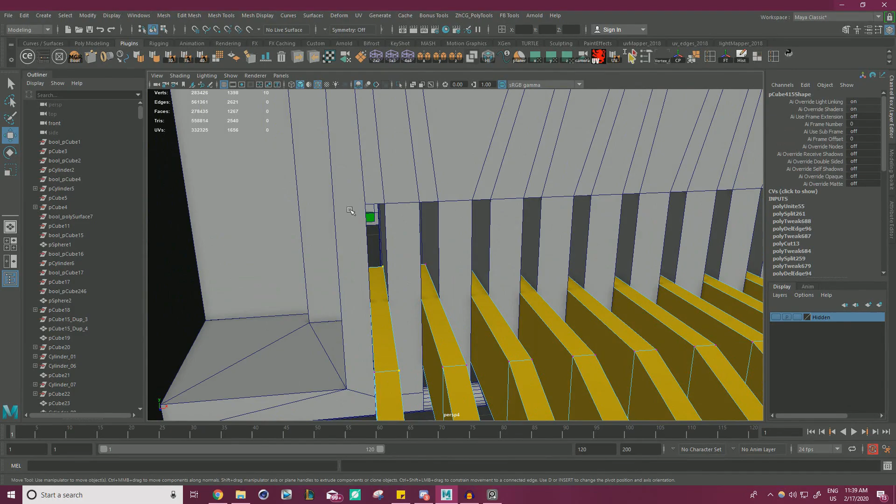And then I would just kind of snap them to these holes here, snapping all the way to the left and all the way to the right, depending on what side it was. Did the whole pass all the way through so everything's even in size, and it's definitely looking a lot straighter and nicer. Then of course I mirrored it over to the other side.

We kind of went over like 99% of it in the last part. I just wanted to make it clear that I did clean it up a bit. So now if I isolate it, it's definitely a lot straighter. There's no weird twists or turns or anything like that, and doing a pass like that was pretty necessary to get everything lined up properly.

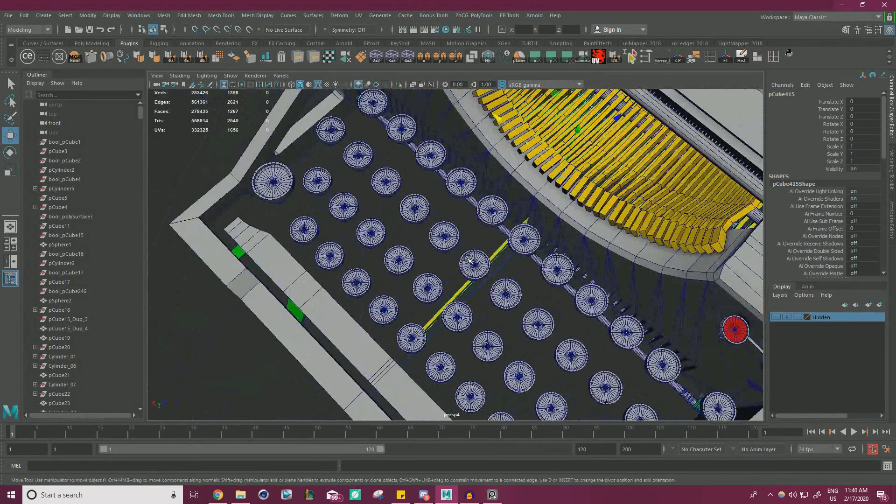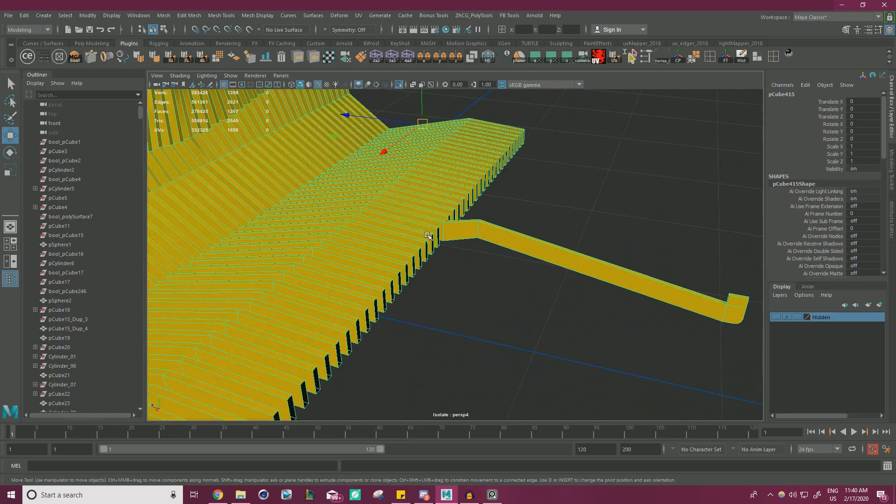But with that done, we can move on to this front part. I'm thinking about it quite a bit - there's always some unexpected twist or turn that comes up, but I'm really hoping this doesn't take too long. So I already have this front piece from the middle. If I isolate this, it's pretty much what we've done before, but it goes up, down, and then plugs in right here, with a bit of a curve to it.

What I'm going to be doing is duplicating it and repurposing it for the rest of the keys. So with that selected, we can go to our Smart Duplicate face. I'll probably just leave that open. We can center pivot, and let's just move it to the side now.

This should be fine, but essentially we can just go through and snap it so it's level. It seems like the width is a little bit different, so what I'm going to do for convenience sake, just so everything is consistent, is move it to the middle and then snap the width of this. That way everything else is the same.

If you isolate it, we want this end cap face to be deleted, and these end cap faces are also deleted, so we can just merge them pretty easily. But essentially we're going to want the keys isolated, kind of all of this stuff, because we're just connecting this stuff, right?

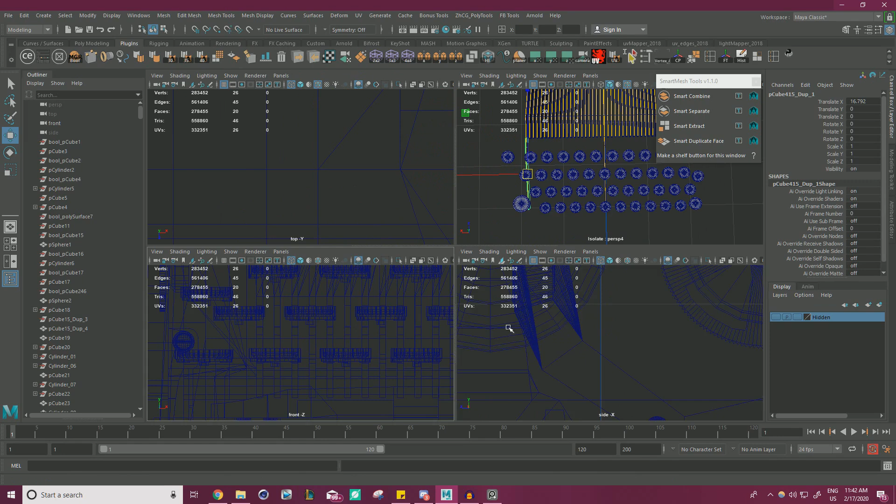So I'm going to be going from left to right. We can't really mirror this stuff over as far as I can tell because it's not perfectly symmetrical. If I go to my top view, yeah, everything's sort of shifted over, so we'll be having to do each key one at a time, which isn't too big of a deal.

One thing to note though is these extra keys that are different sizes - I think this is one of them. I'm just going to want to not do these ones, so I'm going to color them red so I remember them. I can't remember if this is one of the main keys.

I'm going to count. There should be 42. So: 1, 2, 3, 4, 5, 6, 7, 8, 9, 10, 11, 12, 13, 14, 15, 16, 17, 18, 19, 20, 21, 22, 23, 24, 25, 26, 27, 28, 29, 30, 31, 32, 33, 34, 35, 36, 37, 38, 39, 40.

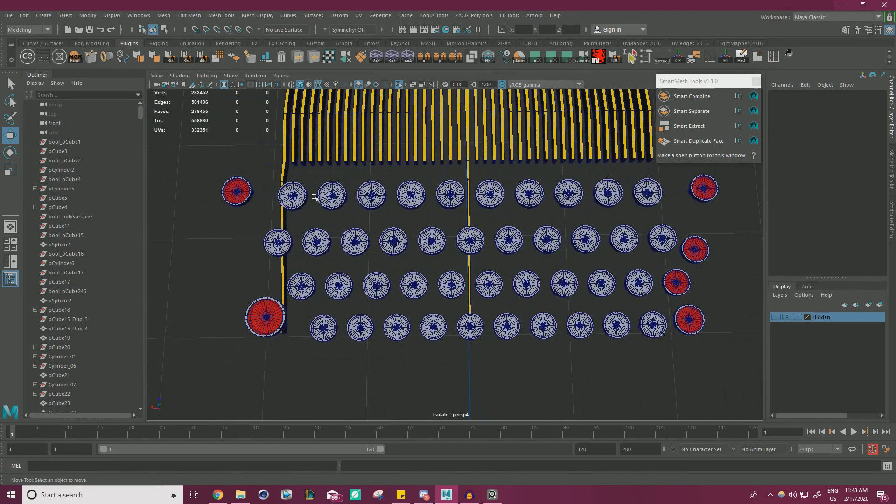That's only 40? Let me recount: 2, 4, 6, 8, 10, 12, 14, 18, 20, 22, 30, 32, 34, 36, 38, 40, 41. Okay, I miscounted - so this one is one of the 42. I'm going to change the color back to gray, and we'll be sure to connect that up.

The reason I don't want to connect to these guys is because we only have 42 of these connection pieces, and we have reference of these larger side ones having different connections. Like this is an example - it bypasses the regular system and goes to the back. Same with this here. So these guys get a special treatment. The main ones though just get connected to these yellow pieces.

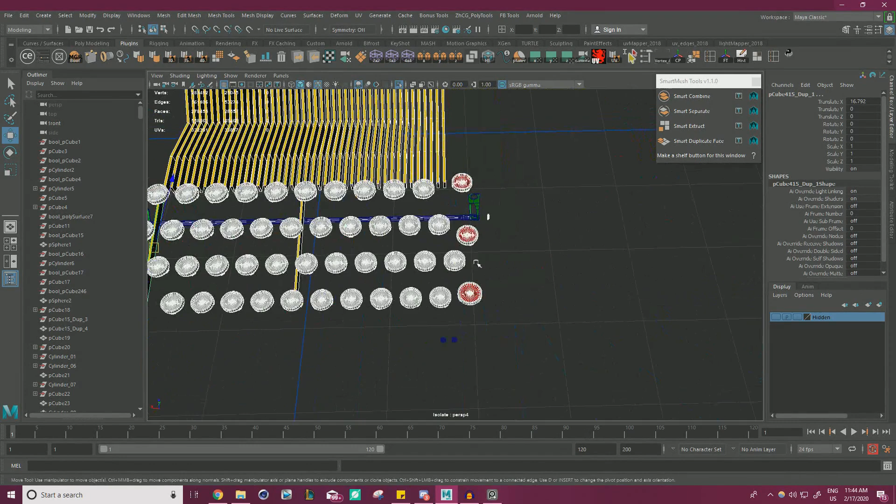So let's go back and select all of that, isolate it. Okay, so yeah, let's just go left to right. Should probably end up deleting those faces because we don't really need them. And essentially, we're just going to have to plug everything in. So I'm going to move the pivot to a corner here.

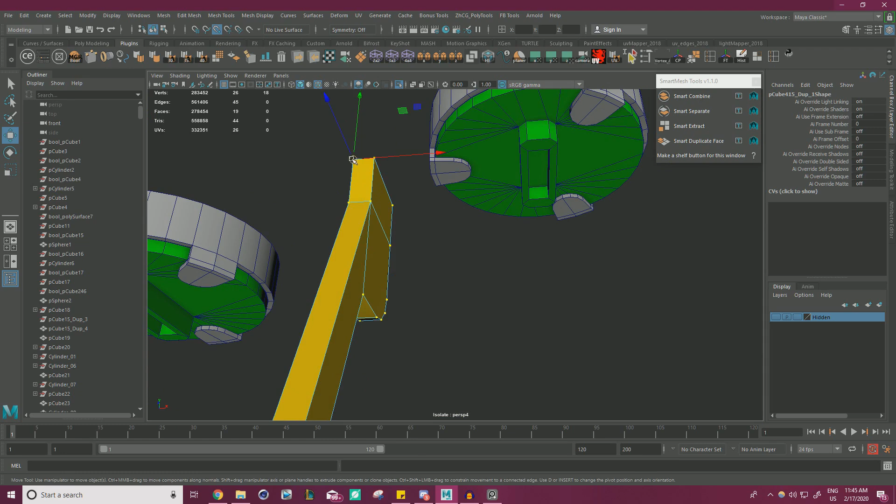We can just sort of snap it. Obviously, this is not correct. So let's grab this and drag it down. Move the pivot here and snap it with this so it's level height-wise.

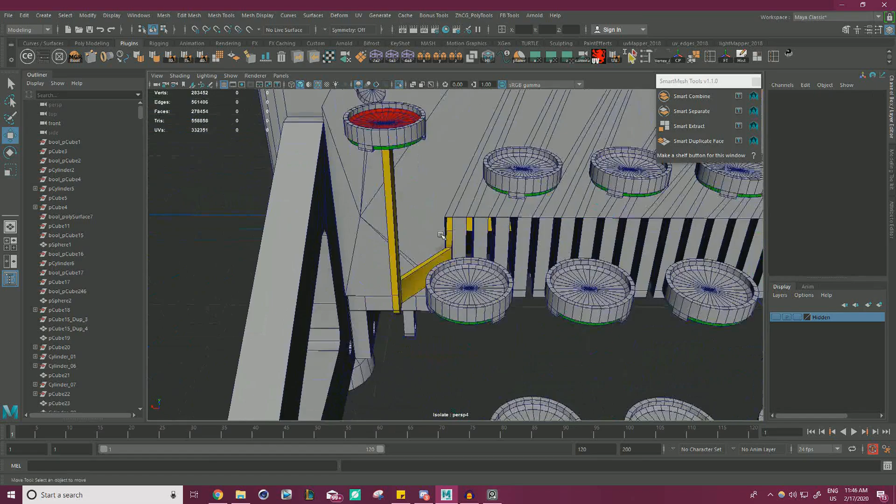Move this forward so it's level. And maybe we should include the frame here, as well as this guy, just so we have a better idea of what we're doing. So this is kind of off to the side. In fact, it's being plugged into one of the red ones that we agreed not to do that for.

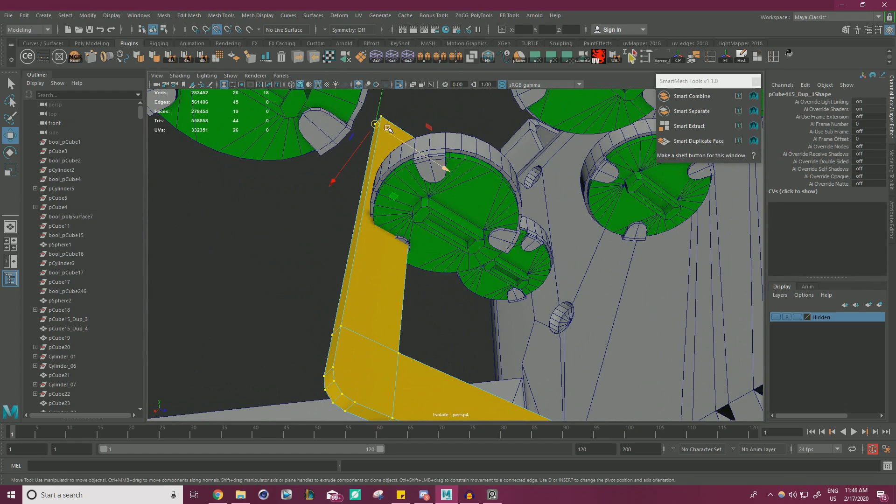So let's grab this. I think I'd probably put it to this one because this is the furthest left. Let's just sort of do this plug technique where we move the pivot to a corner, snap that, reset the pivot and move it up a little bit, and then we'll clean up the bottom.

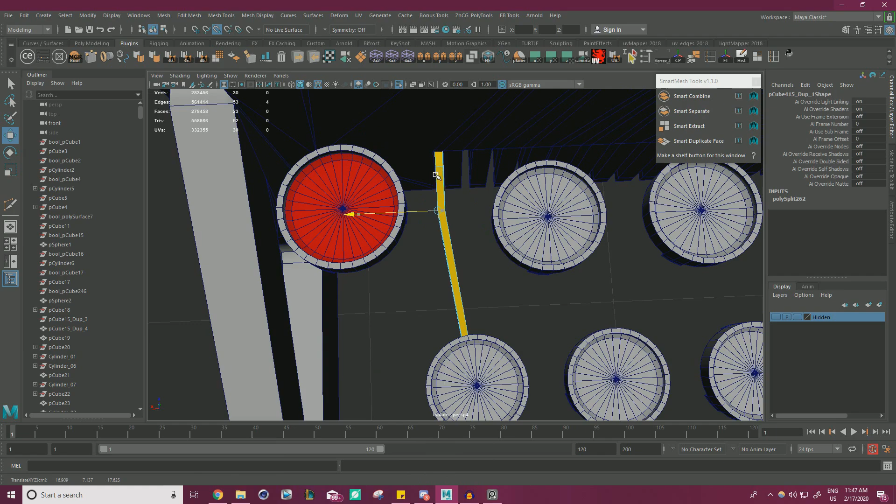So to clean it up, I think what I'll end up doing is adding in a cut and just snap it to the side so it's level, so it's at least coming out straight before it turns and rotates a bit. I'm trying to think where the best length to sort of have the straight part be.

Should it be straight and then curve right away out of it? Or be mostly straight and then curve at the end? I think I'm liking that a little bit more. So I don't want it coming out curved like this.

So I'm going to add a cut, move my pivot to the corner, snap that to the side, and that way it's mostly straight, curves, and then goes up. That way we can have them all coming straight out of these gaps that we've made. It seems a little bit more natural.

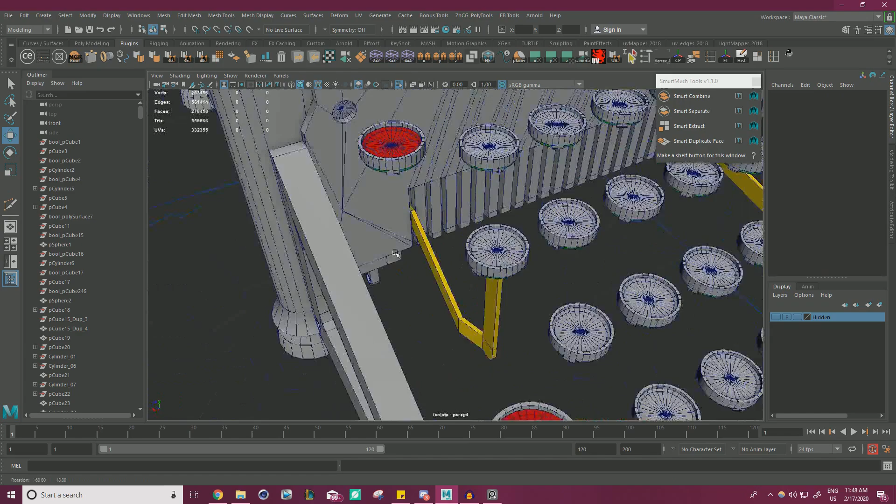Okay, that's one. Yeah, see where it's going to get a bit complicated is these gaps are so close, but then we have like key here, key here, key here. And they're all relatively close in position. So we'll see how that goes.

Let's go ahead and duplicate this. We're going to have to move our pivot to the corner, snap it. This one, we can do this one that's further down.

So same as before, put the pivot in the corner. Snap it, raise it up a little. I'm going to delete this for now so it gets re-straightened out. We'll add in a cut. Move the pivot to the side of the cut, and then we will force it to be straight.

Interesting, so this is an example of something we'll have to look out for. It's intersecting because we can't have it go straight that far, so when we're adding these cuts, it's going to have to be further back, so it's not intersecting with any geo.

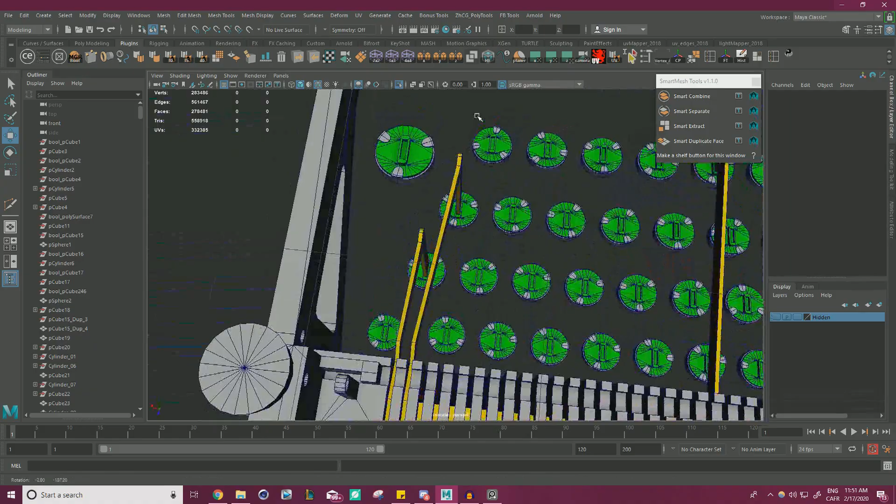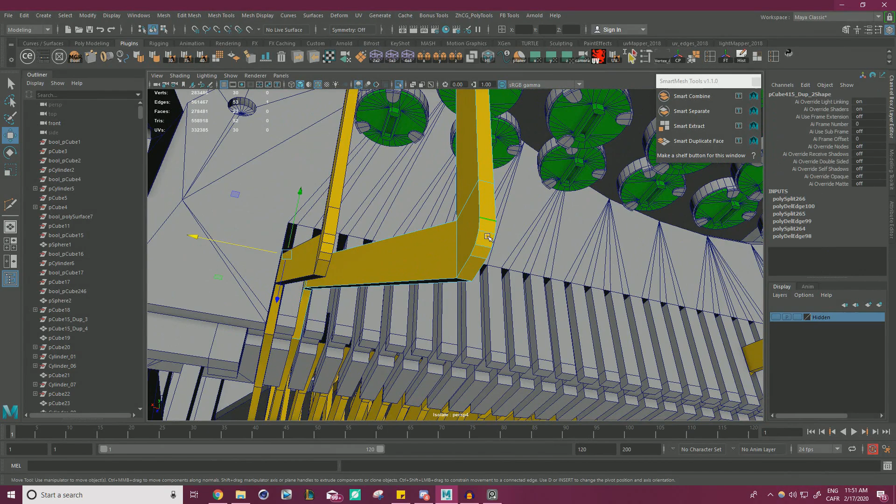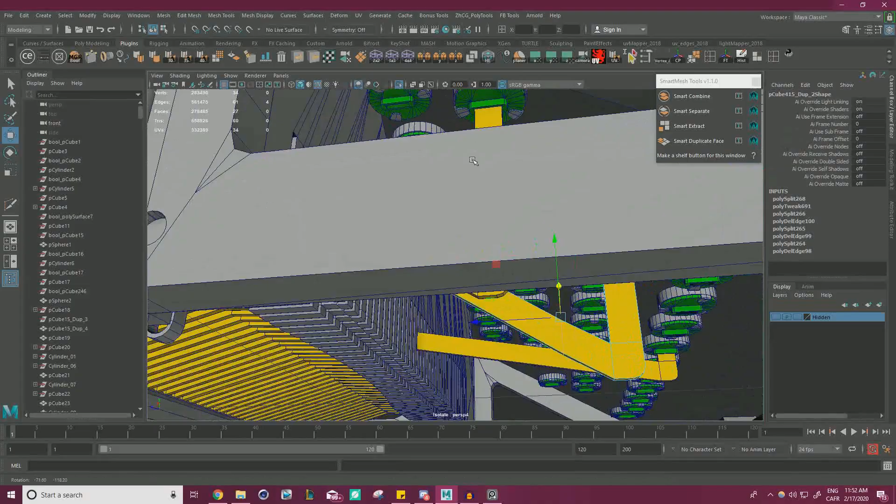I'm wondering if it looks weird to have this straight and then curve. I guess it kind of has to be that way though. Right? Unless I take these, move a pivot to a corner and straighten it out. Because in that way it's straight. And I think we'll probably do that kind of method where we straighten it out at the end, so it's straight, curve, straight.

Can do it for here as well. I think that works. Some of these more modern keyboard references I'm seeing, they're all coming out very straight. But as far as I can tell, we're going to have some sort of curves. It's the only way we can get them through properly. So we'll continue with this sort of method.

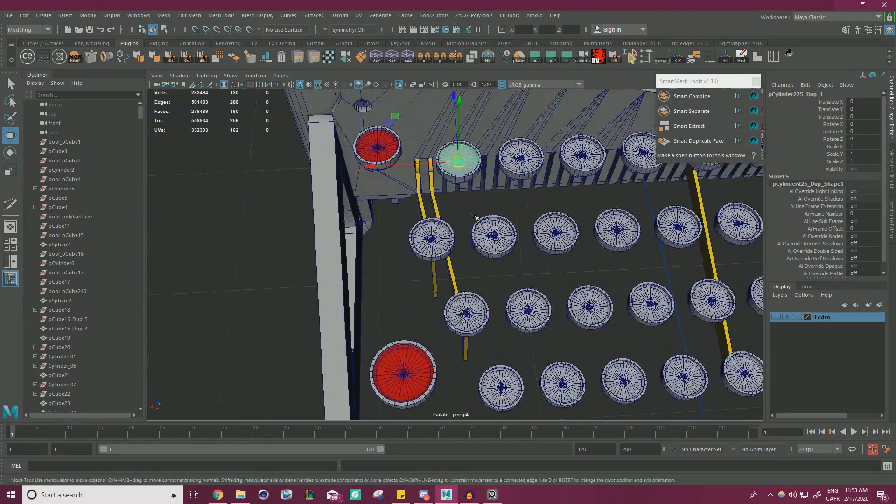We'll do this one next, since it's the next one in line. Duplicate that over. Pivot seems to stay there, which is really nice. So I'll keep this cut here. Or maybe not. I think that'll ruin things if we change the depth.

So I'm going to delete that. Grab this. Of course, move our pivot. Plug that guy in there. Okay, so let's delete this. Add in our cut here, make it level. Make sure to keep this straight.

I wonder if this is going to work for these short ones. If I then take this and snap it there, that looks a little bit goofy with the spacing. Unless I were to like pull it down.

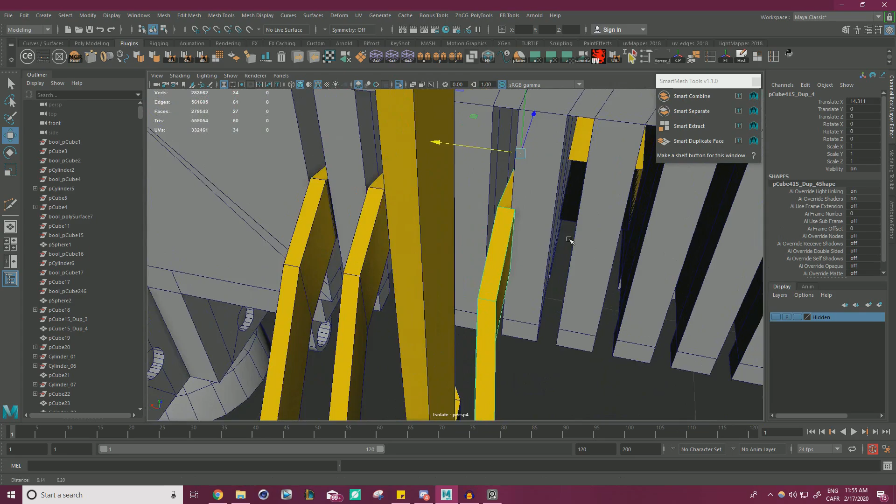Okay, that's another one. Now we have this next row where these two are in line. I think we should prioritize the back ones first, because we want less in our way on the way down, so we can do this one afterwards. So I'm going to duplicate this guy. Snap it there. Go ahead and delete these two for now.

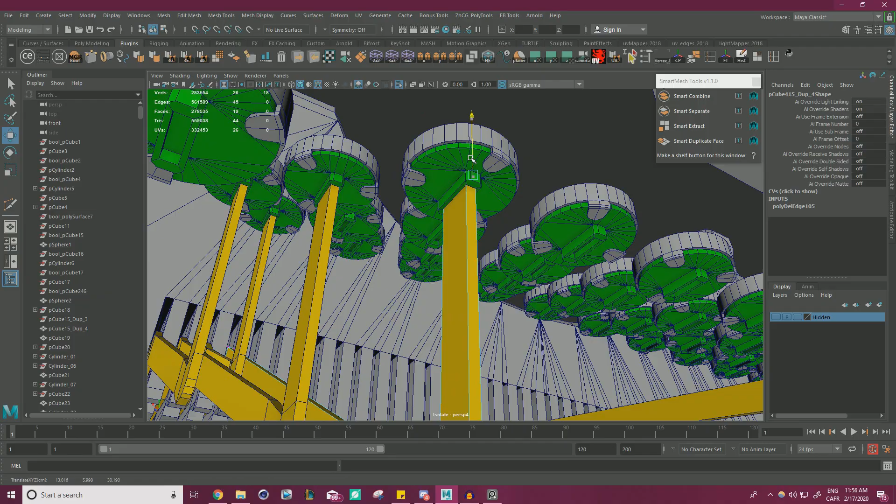We'll snap this, and of course pull it up a little bit. This is going pretty far down, so I guess we could raise it up a bit.

I guess that's something I should check in the reference, if those sort of hook parts are all equally low to the ground.

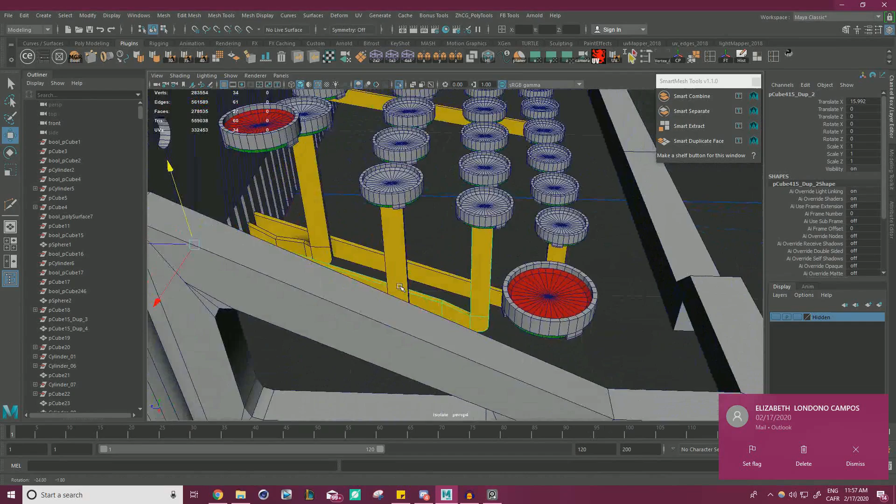Yeah, it kind of seems like each row is equal. We don't have any that are in the same row, but it seems like they go lower down each step. So highest, second highest, third highest, fourth highest.

Okay, we seem to have that pretty good. I might want to raise it. Just want to make sure they're relatively equal distance away from each other.

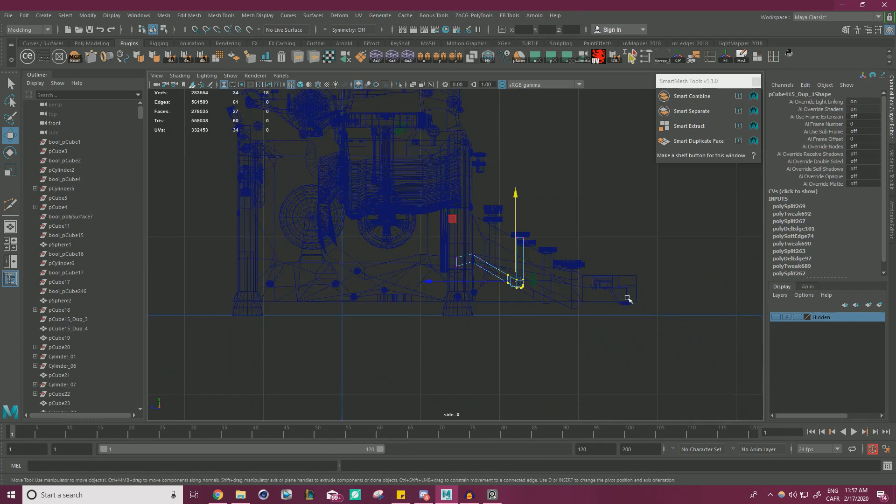So let's see. 1, 2, 3, 4. Yeah, they're all following this line. It's mostly just this one that can afford to be a little lower. I just don't want it to be going under the foot, right?

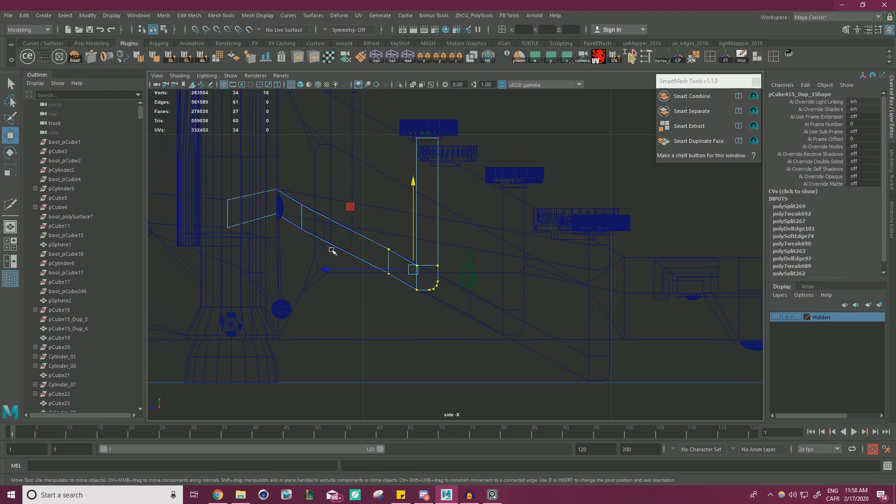So we'll have it going that low. We'll have this one going about that low. I feel like that's probably going to mess a few things up.

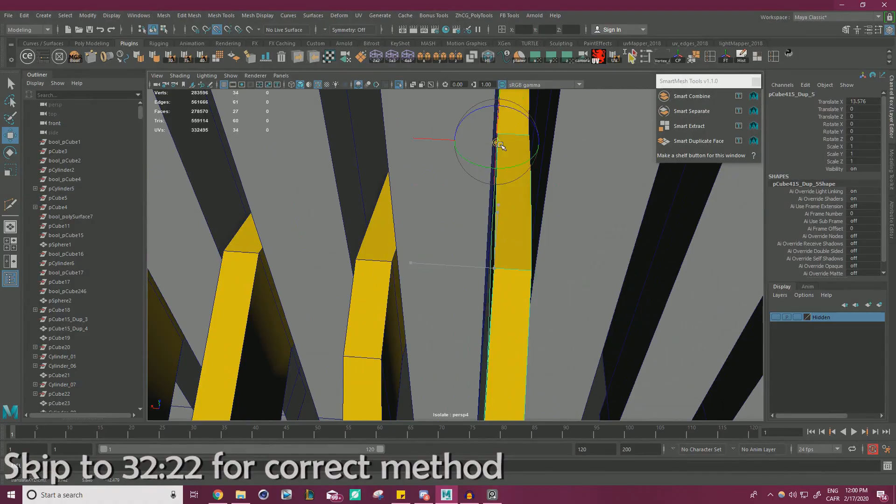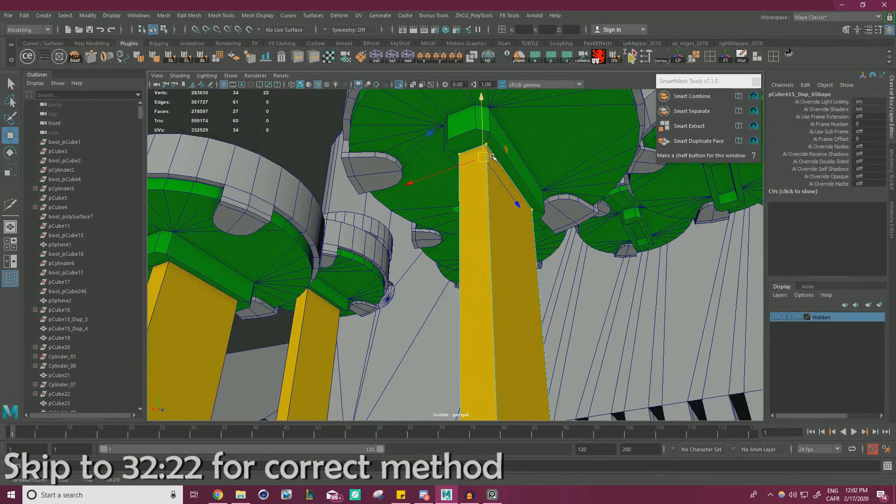Previous to this point in the video, the points I want to make are how we're connecting everything through the bottom there, and that each one of these keys has a different height that the bottom point is going to. Other than that, you can skip ahead to that time point watermarked at the bottom there, and I'll do a basic commentary explaining what I'm doing, because I ended up recording that part without talking over it since I wanted more time to think. But I will explain what that's illustrating in a couple of minutes. So if you skip there, I'll explain what's going on.

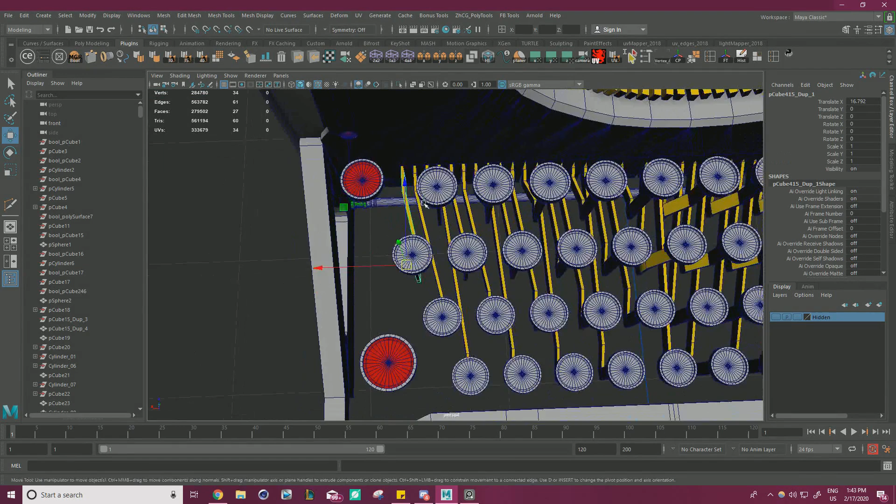Like I said, I'm not going to comment on all of this, but basically you just have to set up one of each key and duplicate it over, and the video should explain that and show it off pretty well. So it's sped up a little bit. Hopefully you guys follow along that easily. It's actually a much more simple process than I initially thought, so this will illustrate that pretty well. No new techniques here, so I don't feel like I need to explain it in too much depth. But hopefully you guys enjoyed this part, and with this, the keyboard is actually done.